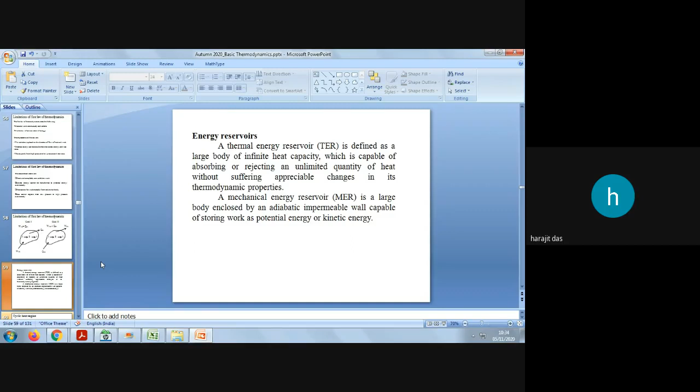Understood? Yeah. So first we will be studying the cyclic heat engine, or heat engine cycle. So what is a cyclic heat engine, or what is a heat engine? Basically your automobile engine is also a heat engine. Electric generators are also heat engines. Basically they operate in a cycle. So what is a cycle? In thermodynamics we have defined a cycle like this: if the initial and final states are the same, then we say that the thermodynamic system is in a thermodynamic cycle.

Understood? So here it is defined: a heat engine cycle is a thermodynamic cycle in which there is a net heat transfer to the system and a net work transfer from the system. The system which executes a heat engine cycle is called a heat engine. Understood? So when the initial and final conditions are the same, the system will be doing some processes, isn't it? In some processes heat will be taken by the system, and in some processes work may be done by the system.

But finally what you will get, you will see that the initial state and the final state of the system are same. Okay, system is same. So an engine which executes a heat engine cycle is called a heat engine. So what is a heat engine cycle? So we will see. I think all of you know what is a heat engine cycle, because I assume that all of you have watched those videos.

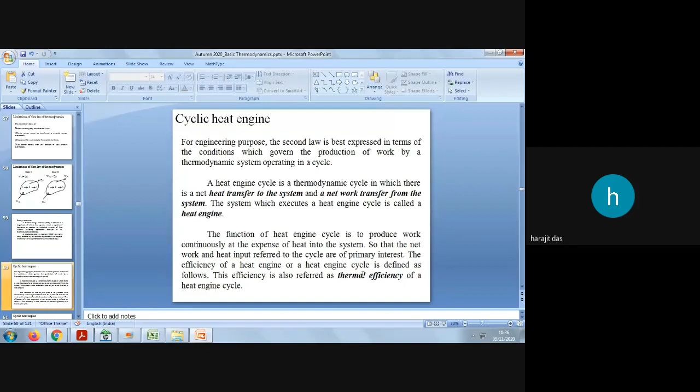Okay, the efficiency of this heat engine is called thermal efficiency. Okay, so you need to remember that thing. The efficiency of a heat engine which undergoes a cyclic heat engine cycle is called thermal efficiency. And the definition of this efficiency is given as net work output of the cycle, W net, by Q1. So why this is W net by Q1, we will see now.

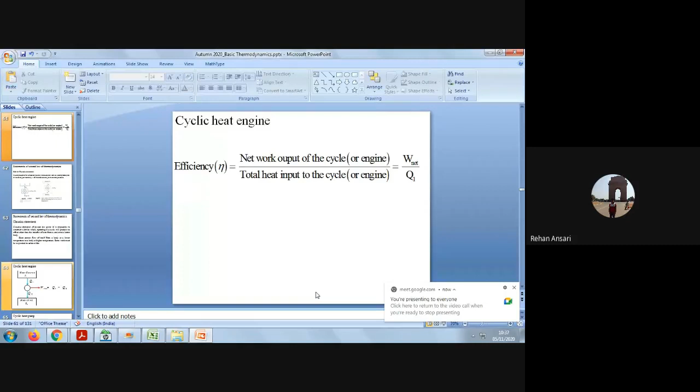My voice is audible to you? Anyone please respond? Yes, sir. Yes, okay.

Piston cylinder engine, because in our motor vehicle engines there is a cylinder and piston arrangement. In between this piston and cylinder, our petrol and diesel is burned, isn't it? So we are getting some power, which means some work is done by the engine. So it is a heat engine, that is why this basic component is taken here as an example of a heat engine.

So how will the cycle happen, why will it be a heat engine? Because the process will be a heat engine cycle. I will tell you how. In this piston cylinder arrangement the fuel will be there. So the system will take heat, and when the system takes heat, the molecules will collide, so there will be intermolecular energies. They will exert some pressure on the piston surface.

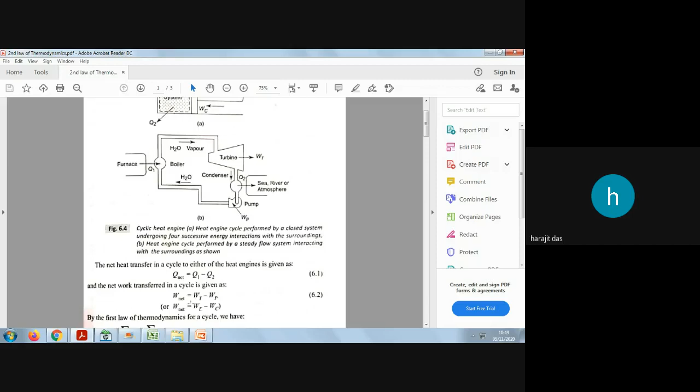In a cycle, the net amount of work, W net, will be equal to Q net. That is the first law, but we are going to study the second law. So the summation of Q will be equal to the summation of W. Why are you able to write this? Because they are following some cycles. So instead of Q you write Q1 minus Q2, and instead of W you write WT minus WP.

So basically we are going to find out the thermal efficiency. This is the same as I told you, the heat engine efficiency is denoted by thermal efficiency, and this is defined as output by input.

So what output are you getting? You are getting work, everywhere you are getting some net work output. For a steam turbine or steam power plant, what is the output? We need to produce electricity, and due to this work output only you are able to generate electricity. Similarly, in an engine, because of this work, we are getting power, and that is why you are able to run your wheels.

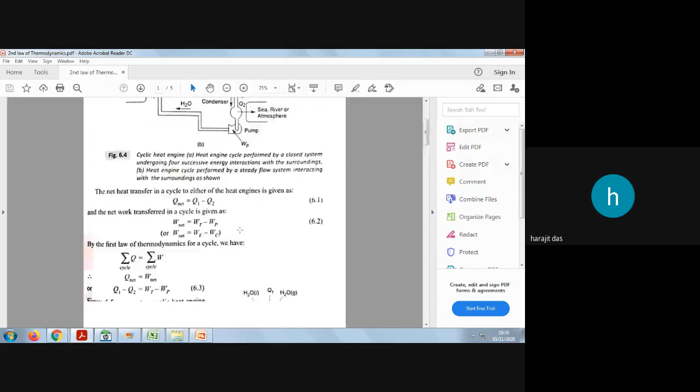So W net divided by Q1. Why Q1? Because the input heat was how much? For both cases of this heat engine, Q1 is the amount of heat absorbed, and you are getting some W net. Here also Q1 amount of heat is applied to the system, and you get some W net, which is why the wheels run for this vehicle.

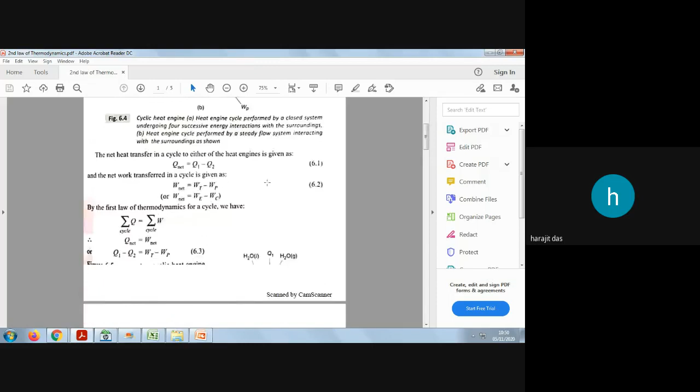So it is W net by Q1. What is W net? For this steam power plant, it is WT minus WP, work done by the turbine minus work done on the pump.

Because work is done on the pump, you are applying motor work. So on the motor, work needs to be done, but in the turbine, work is done by the turbine. So WT minus WP by Q1.

What is WT minus WP? In a cycle, the total summation of work will be equal to summation of heat, isn't it? So Q1 minus Q2 equals WT minus WP. So Q1 minus Q2 by Q1. If you just arrange these terms, Q1 by Q1 will be 1 minus Q2 upon Q1. This term will remain as it is.

From this term, what you can conclude is that since heat Q1 transferred to a system cannot be completely converted to work in a cycle, W net will be less than Q1. So by the second law, W can be converted to an equivalent amount of Q, but Q cannot be converted to an equivalent amount of W.

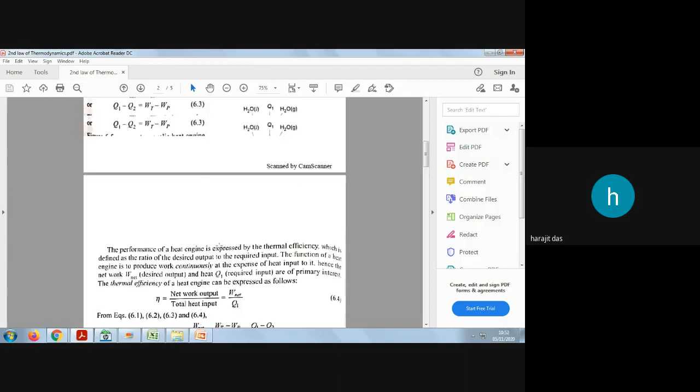If eta was 1, that means the engine has 100% efficiency. But here Q2 is not 0, isn't it? Q2 has some definite value, that is why the water is condensed. So Q2 has some definite value, and 1 minus some definite value will always be less than 1. So this right hand term will always be less than 1, that is why thermal efficiency of a heat engine cannot equal 100%.

So this is the reason, and this is the analysis, this is the mathematical expression by which you can prove that thermal efficiency of a cyclic heat engine cannot be 100%. It will always be less than 100%.

That is why engineers are doing work on engines. Different companies are manufacturing different engines so they can increase the thermal efficiency. Basically the efficiency is 30 to 35% for SI engines and 35 to 40% for diesel engines. So for petrol engine 30-35%, diesel engine 35 to 40%. And 60 to 65% for modern gas or steam power plants.

So engineers always have the scope to increase the efficiency. That is why day by day you will see newer, innovative engines for innovative vehicles. So there is scope for increasing efficiency, by introducing turbocharged engines, and other types of technologies are also there.

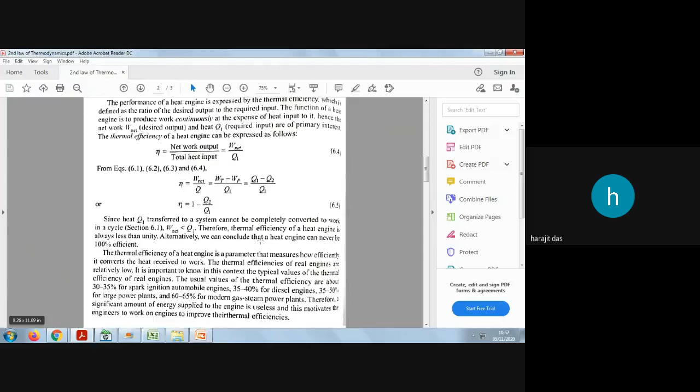So what is written by the Kelvin Planck statement: it is impossible for a heat engine to produce net work in a complete cycle if it exchanges heat only with bodies at a single fixed temperature. It needs to reject heat at another source to produce W net work. In all those examples, Q1 amount of heat is taken and it produces W net while rejecting heat Q2. If this rejection part is not there, it cannot produce W net from Q1 amount of heat.

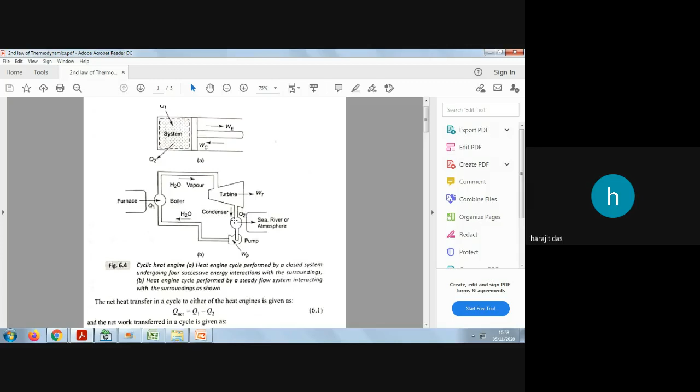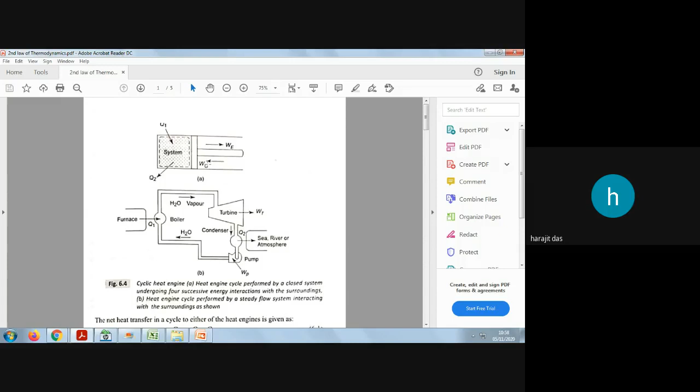So here also it is taking q1 amount of heat and doing W net while rejecting heat q2. If it is not rejecting heat q2, this W net will not exist. So this is all about the Kelvin Planck statement. Now another statement is there.

So q1 minus q2 equals W net. For our examples, it was work done by turbine minus work done by pump, which is exactly equivalent to q1 minus q2. Because by the first law you can write W net equals Q net for a cyclic process. So this is the cyclic heat engine.

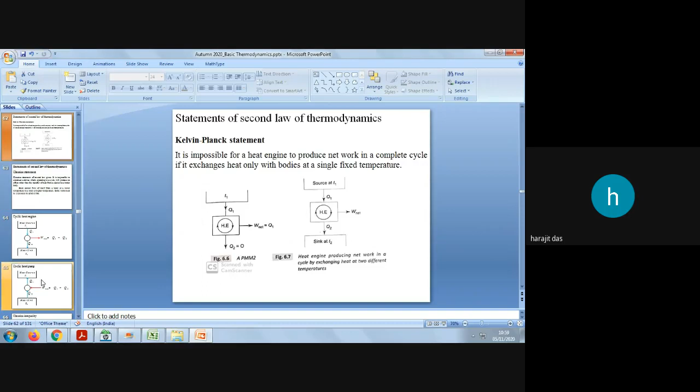So heat engine is covered. Another concept is heat pump, because to define the Clausius statement, we need knowledge of what a heat pump is. So we will see this heat pump in the next lecture.

Dear students, are you able to understand this Kelvin Planck statement of thermodynamics? Any doubt? I think now it is clear to all of you. And now you have got some idea of what you need to write on your copy.

And I will be sharing the notes. This second law of thermodynamics sometimes gets intermixed, because Kelvin is saying some statement, but the construction of the statement is a bit difficult, and Clausius is also saying something, but the summary is the same. Finally we will see that the Kelvin Planck statement and Clausius statement are both the same. If you violate the Kelvin Planck statement, the Clausius statement will also be violated - like that it will happen. We will see those things in the next class.

By next class, your second law of thermodynamics will be over. After that I will give some assignment, some questions, and notes also I will be sharing with you, and then it will be very much clear to you, and you won't forget throughout your life.